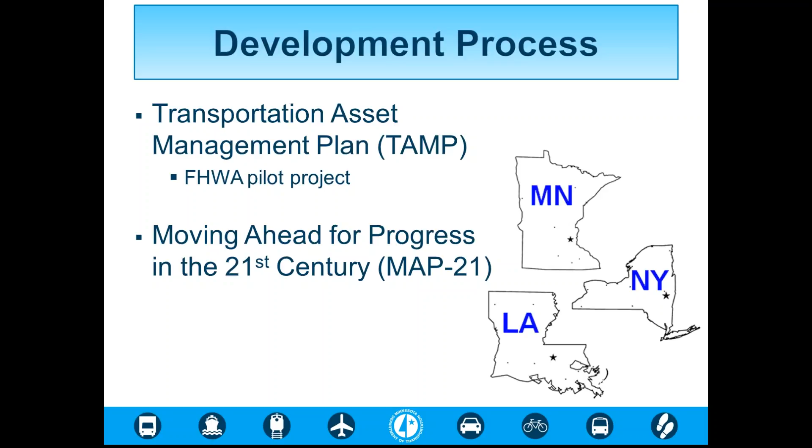Right now, the Transportation Asset Management Plan was finished last summer, and the rules came out. It's in a final draft format, and we're waiting for the rules to be finalized to see if any changes are needed, and then we'll adopt it and make it final after any needed changes, if any.

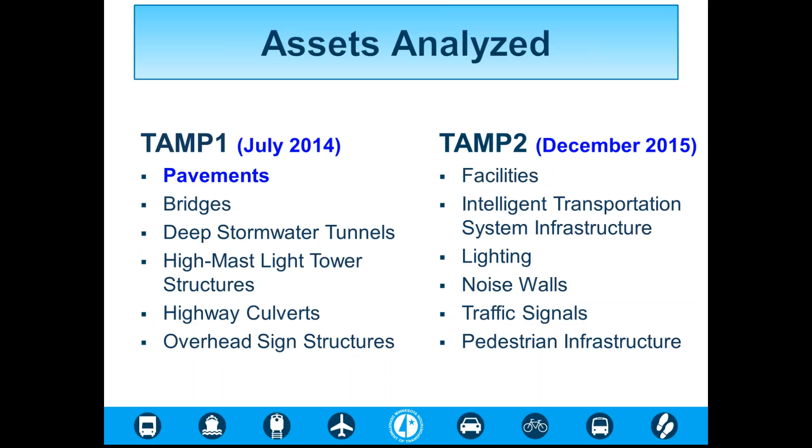Asset management is elevated to the highest level within the agency, and we've received direction from senior leadership to continue with this asset management planning initiative. So we've moved on to completing a TAMP 2 for the assets you see here, with hopes to wrap that up by the end of this year.

Let's get into the second piece of the presentation today, focusing on the TAMP pavement lifecycle costing. The primary purpose is really threefold.

One, to convey strategies for managing an asset effectively using preservation activities. Two, to quantify future maintenance requirements associated with capital improvements and expansion projects. And three, to determine whether replacement decisions are being made in a timely manner and whether an agency is capitalizing on preventative maintenance opportunities.

LCCA, or Life Cycle Cost Analysis, in the TAM should answer the question: which investments made today are most cost-effective in the long term to keep assets at an acceptable level of service? That's really the most important question to answer as you move forward with life cycle costing.

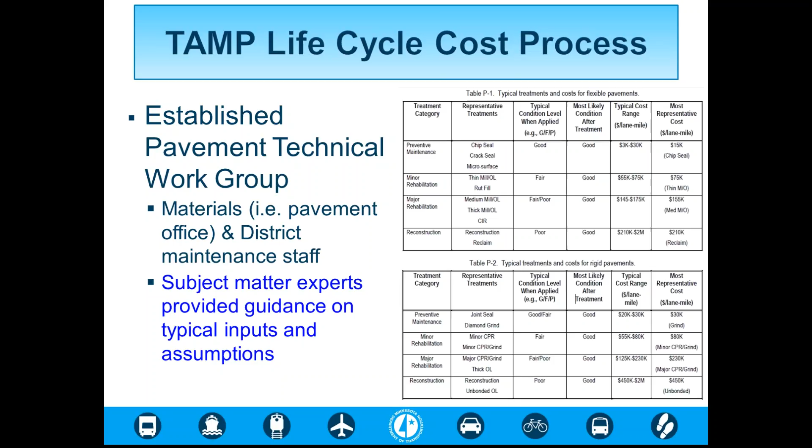There are a couple of tables here taken from pre-assignments we sent to the technical work group for pavements. We asked them to identify the preventative maintenance, minor rehabilitation, major rehab, and reconstruction. You can see the treatments occurring, at what condition level, the most likely condition after treatment, and the costs associated with those treatments.

In terms of the inputs and assumptions, there are roughly a half dozen or so inputs and assumptions for pavements that were collected throughout working with the technical work group. One I'd like to focus on is the 70-year analysis period. That period was selected to capture one major rehab treatment beyond a desired life cycle cost approach, where reconstruction occurs at approximately 50 years.

Second, several treatment cycles and costs were used to compute life cycle costs for flexible and rigid pavements, then combined into one composite value based on weighted averages of the percent of rigid and flexible pavements at the network level. You can see that in bullet 4, specifically the sub-bullet under bullet 4.

Other important things in the discussion of pavements for the LCCA were inspection and operational expenditures. They were investigated but not included in the modeling. Lastly, routine and reactive maintenance costs were included in the LCCA model, and I'll talk about that on the next slide.

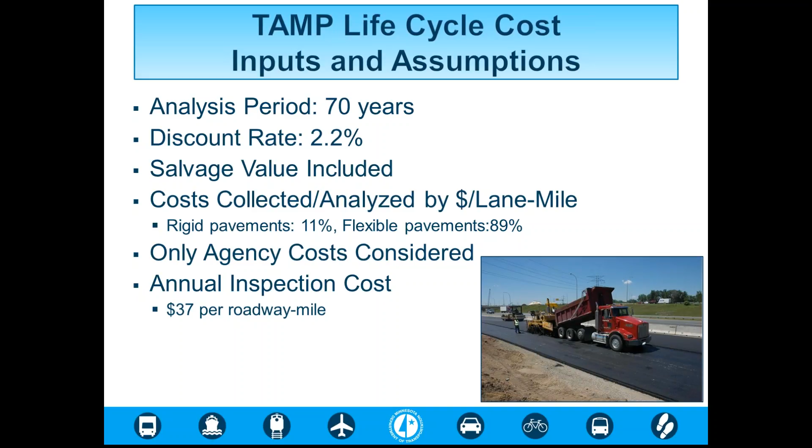As far as routine and reactive maintenance inputs and assumptions, historical expenditures on routine and reactive maintenance were collected and incorporated into the models based on 2012 data collected from MnDOT's Metro District in the Twin Cities metro area. We know that in 2012 we spent $1.4 million on maintenance activities for pavements. That number could not specifically be tied to condition level, good, fair, or poor, but we do know that money was spent on 482 lane miles of pavements, which are broken down by condition in the third bullet on this slide.

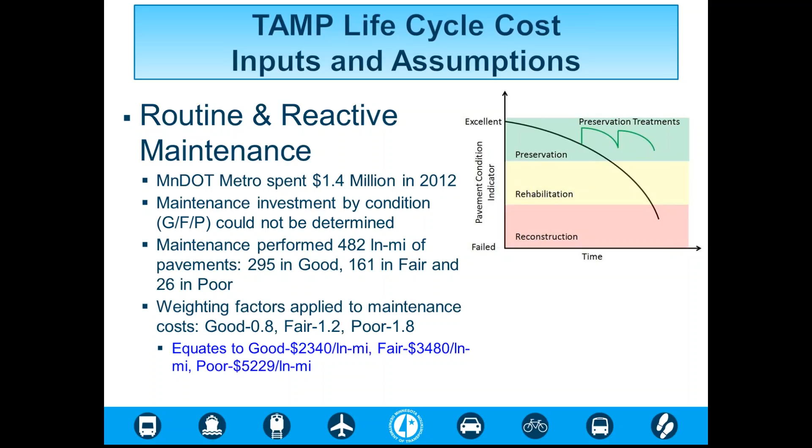So the approach we took was to use a weighting factor and apply it to the maintenance cost: 0.8 for good, 1.2 for fair, 1.8 for poor, which equates to those numbers per lane mile spent of that $1.4 million. Those numbers were incorporated into the pavement model.

MnDOT's TAM life cycle cost analysis compares a worst first, a typical, and a desired approach to pavements. The mill and overlay strategy, which I'll show you on the next couple of slides, represents MnDOT's typical life cycle cost approach, while the full depth reclamation or reconstruction represents MnDOT's desired life cycle approach.

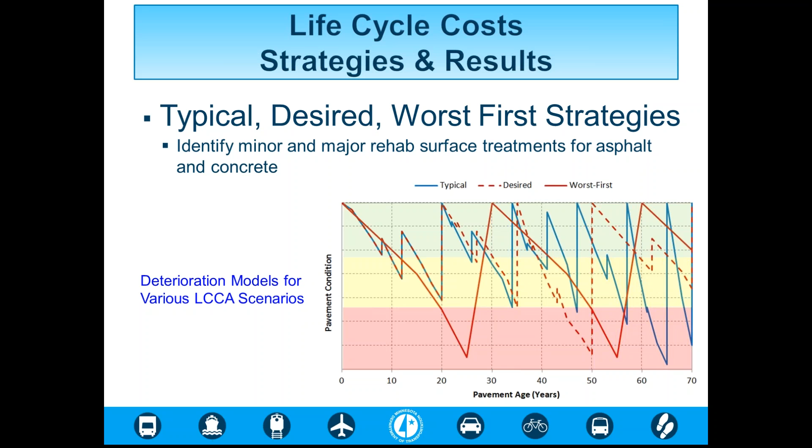The graph on this slide illustrates what happens under each strategy in terms of pavement condition associated with minor and major preservation treatments. The smaller dips indicate minor preservation treatments such as crack and surface treatments, and the medium dips indicate major preservation treatments such as mill and overlays. The large dips, seen between years 20 and 30 for worst first, at year 50, and between 50 and 60 or after for the dashed red and blue lines representing typical and desired, really indicate the reconstruction or full depth reclamation activities occurring with desired and typical strategies.

So we put together and collected the information on the inputs and assumptions and all the data working with the technical work group. We were able to develop these strategies and understand the approach the agency takes. As mentioned on the previous slide, MnDOT is at a network level taking a mill and overlay strategy for flexible pavements system-wide. Of course, this is not occurring on a project-by-project level, but at a system or network level, this is our typical approach.

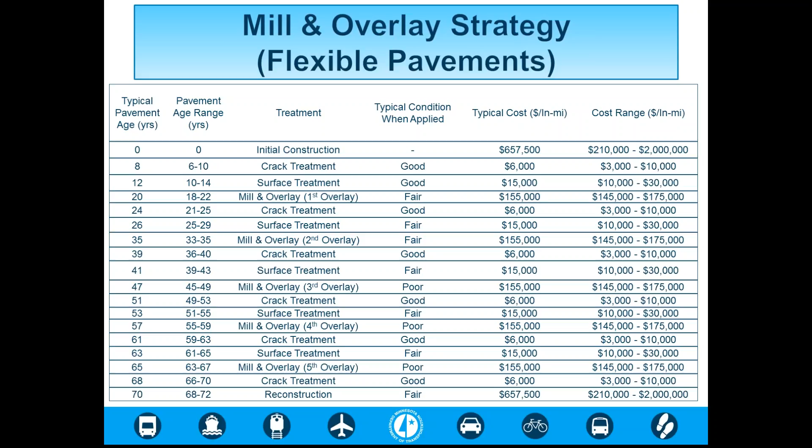Using this information, we were able to put together this strategy, and this table shows that the typical strategy shows reconstruction occurring around 70 years. Now the FDR, or the full depth reclamation and reconstruction strategy, as mentioned earlier, is our desired approach that came out of the modeling.

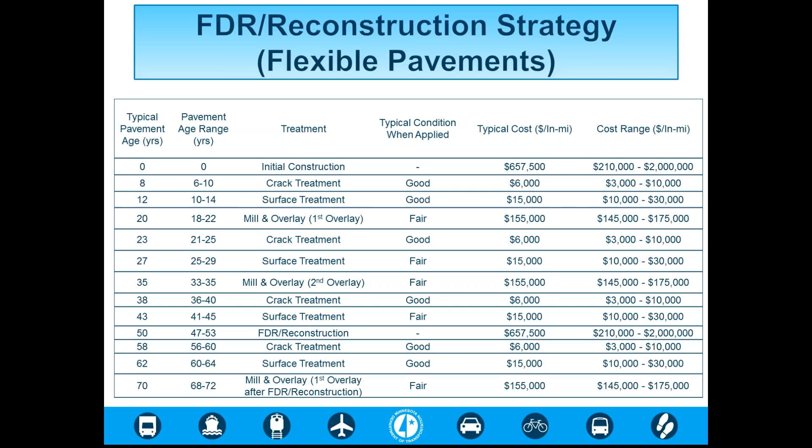In conclusion to this strategy, as a result of the TAM pavement lifecycle cost analysis, we are now identifying more pavement projects that are eligible for upscoping to be reconstructed beyond that 50 years, if you looked at the typical approach, to be more in line with this desired approach that you see in the table on this slide.

That's over the entire inventory over the analysis period. But if we were to take a desired approach or strategy and compare that to what we're typically doing, that would amount to a savings of approximately $600 million over currently what we're doing, again over the entire inventory over the analysis period.

As a result, the TAMP LCCA predictive models that incorporate deterioration and treatment costs and effectiveness allow MnDOT to better and more reliably forecast long-term policy outcomes and program development decisions. It's allowed us to do a better job at managing our pavements.

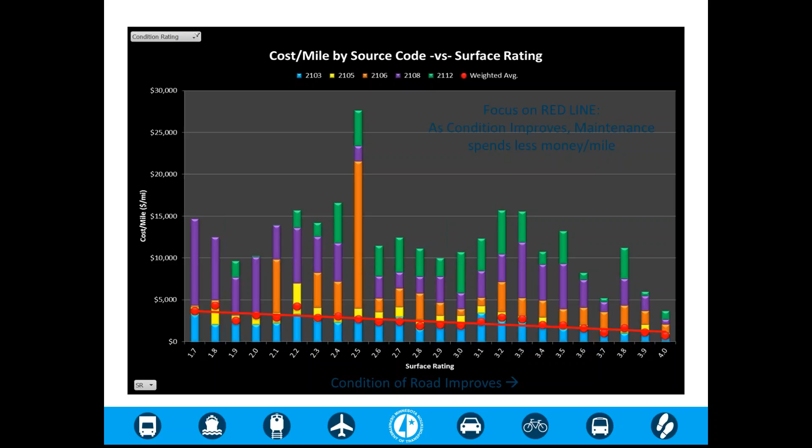So what this means is we're going to take all this information we've collected - and we only have one year of data - and we're going to continue collecting this year after year after year and refine the pavement life cycle analysis from the asset management plan.

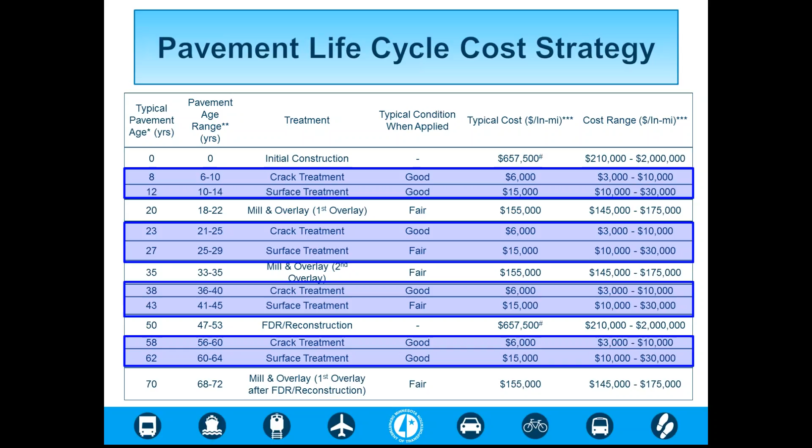That information is going to feed directly into the blue cells you see highlighted here. Having that information will allow us to refine those minor preservation treatments as part of that life cycle cost analysis.

So thank you, I appreciate your time, and hopefully I've given you enough information to help you move forward with life cycle cost analysis for pavements.

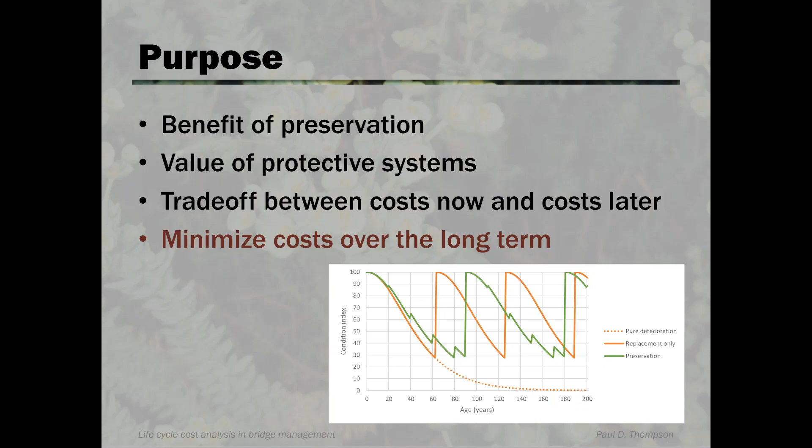So we're trying to keep costs at a minimum over the long term. There are several basic ingredients that go into a life cycle cost analysis: a deterioration model to forecast how quickly different parts of a bridge will deteriorate, cost models to estimate the costs of different kinds of treatments applied to a bridge to either preserve or improve the condition of different elements, and models of effectiveness - what the treatment does to improve condition and how effective it is.

All of those models feed into what's called a life cycle activity profile, which is basically a type of plan for the whole future of a bridge, planning out over time just what kinds of work might be done at different places in a bridge's life cycle. The part you care most about involves spending money now or in the near future, but those decisions also depend on how long you can postpone future costs. So we're trying to analyze what that long-term effect could be.

This will give you some idea of the trade-off between the scope of work you might undertake now and the timing. If you do certain work now, perhaps you can postpone future work till much later. There are also performance trade-offs related to the amount of money you put in now versus the condition of bridges in the near future and the far future. So we would like to use the analysis to shed light on how money going into the system results in good condition coming out of the system.

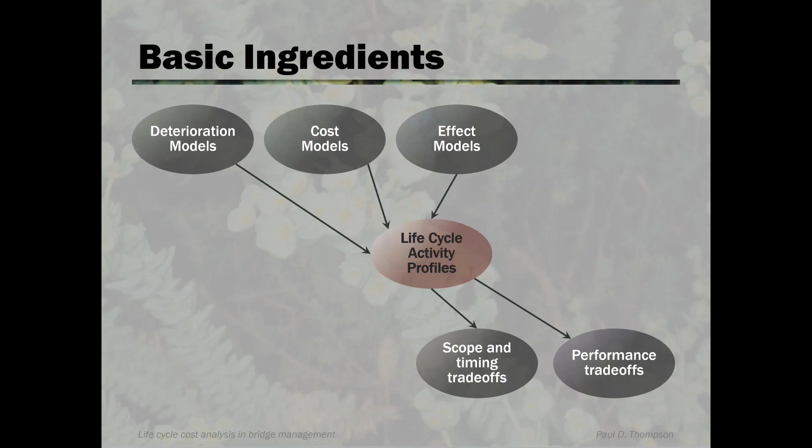Just to give a quick, simplified quantitative example of a life cycle activity profile, here we may be looking at two alternative futures for a bridge over a 50-year period. Alternative number one involves doing preventive maintenance, and alternative number two involves not doing anything right now, but then replacing a bridge relatively soon in 12 years. Under the preventive maintenance strategy, perhaps we can get at least 20 additional years out of the bridge and postpone that replacement out to the 35th year.

One of the key inputs into a life cycle cost analysis is a discount rate. So here I'm comparing a discount rate of 95% versus a rate of 90%, just to see what difference it makes in the analysis. And you can see it does make a difference as far as which of the alternatives is going to be the least expensive over the long term.

At a 95% discount rate, alternative number one turns out to be $799,000 over the long term versus only $464,000 at a 90% discount rate. And that's because you're giving less weight to that future replacement cost.

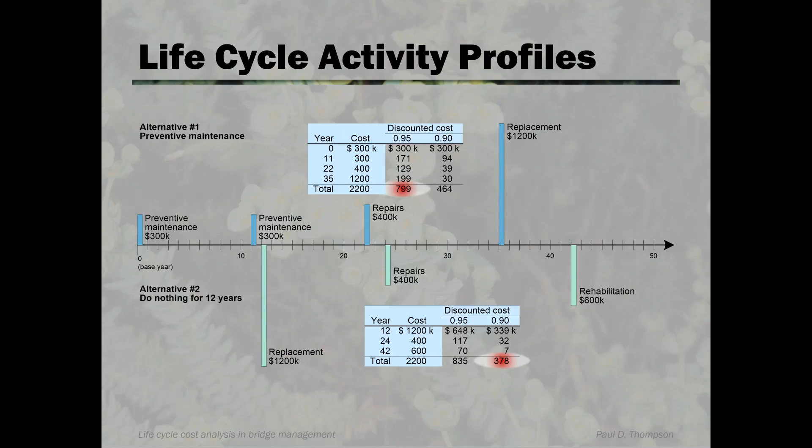Now, one of the first ingredients to do a life cycle cost analysis is a deterioration model. Most of the states have a bridge management system called Pontis, which is used for doing life cycle cost analysis. You can see an example here of just the kind of language used in describing bridge conditions, in this case for painted steel girders.

The states are currently in the process of making a transition to a new version of the condition state language, and AASHTO is in the process of developing a new version of its bridge management software to reflect that new condition state language. So you're looking here at the old version, which is what most of the states are still using today, but soon that transition will move over to a new set of definitions. The concepts I'm illustrating here are the same either way.

So if you're looking at a set of data in your Pontis database, say your past inspections, the only thing you see in your inventory is an inspection in 2005 and another inspection two years later in 2007. Your bridge database doesn't tell you what happened in between those two sets of data. So when you're trying to estimate a deterioration model, you're trying to figure out quantitatively what might have happened between those two data points. The blue lines illustrate deterioration paths, different ways condition may have deteriorated between 2005 and 2007 if nothing was done to preserve the bridge.

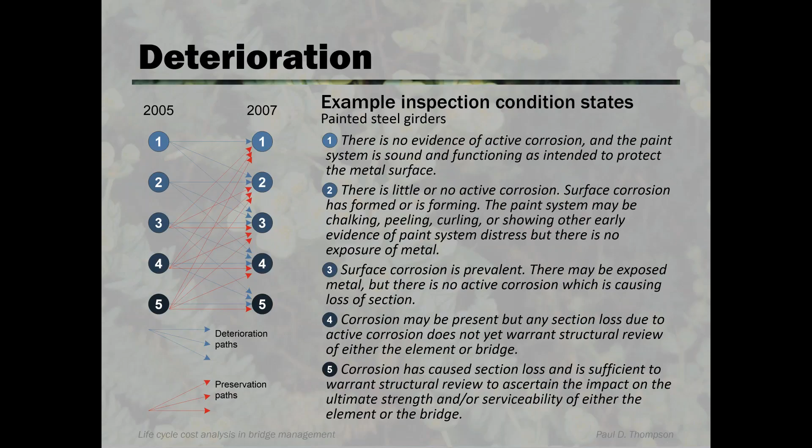The way we quantify that deterioration rate is something called a Markov model, or Markovian model. If you look at bridge management systems around the world, this is pretty much the only way anyone is doing it at the network level. And the reason for that is it's pretty much the simplest possible deterioration model you can have with the types of inspection data that agencies are using.

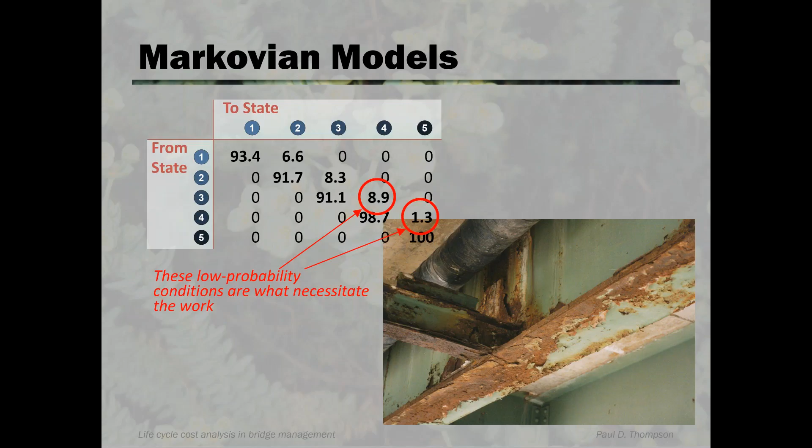So we'd like to be able to develop models like that, and there are some pretty good methods to do that. The first one, and this is what most of the states have been using with their Pontis system, is expert judgment. The great thing about expert judgment is it's easy and cheap. The bad thing is, what we found from our research, is it doesn't agree with real inspection results as well as we would like. It's better than nothing, but you would like to be able to improve on it, and I'll describe what the differences are in a moment.

Statistical modeling is the other approach, and that is definitely the recommended approach. A number of states have started to do this because most of the states doing element inspection have been doing it for quite a few years now and have pretty large data sets. I did an analysis a couple of years ago in Florida where they had more than 1 million records of element inspection data that we could use for deterioration models.

That's a lot of data. You can produce really good models if you have 1 million data points in your database. And that's not uncommon at all—Florida's inventory is just an average size inventory for bridge deterioration modeling.

We found with statistical modeling, you need about 500 inspection pairs. An inspection pair is just an inspection at one point in time and then another inspection 2 years later. So that's a pair of inspections, and you need 500 of them. If you've been doing bridge inspections for say 5 cycles, then you need 100 bridges containing a particular element in order to have enough to do a deterioration model. So it doesn't really take that much when you're looking at a statewide inventory of bridges.

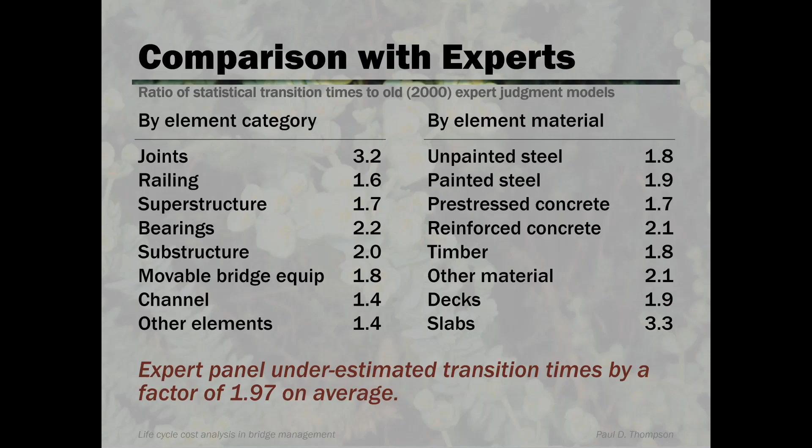The reason is when you get a panel of experienced experts sitting around a table thinking about bridges in the past and how quickly they deteriorated, they tend to remember things that change more easily than things that stay the same. So they tend to remember deteriorating bridges more readily, and that causes them to underestimate transition times. So that's something to be aware of, that your transition times may be underestimated if you're using expert judgment-based models. That's one good reason to do a statistical analysis instead.

Now, in bridge management systems, you also need cost models to do a life cycle cost analysis. There are direct costs of labor, materials, and equipment, and also contract pay items if you're doing contract work. And there also are indirect costs, which are also important. In some types of projects, especially preservation projects, the maintenance of traffic and mobilization could be as much as half the project or even more. So you need to include that because those are all costs that also are affected by a decision to do preservation or not do preservation. It's important to include all of those things, and as Kirby described for you, it takes some effort to get your system set up so you're really capturing good data, but it's a garbage in, garbage out process, so you need to have good data going in order to feel confident with the conclusions that come out.

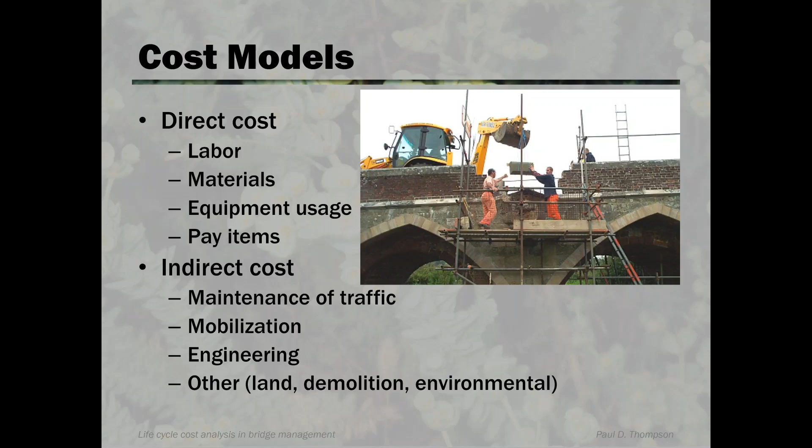In order to develop cost models, one of the things that we've done in a few states is to actually take different elements and group them together into categories that we can more easily map onto maintenance management system activity codes. This worked pretty well. This example is from Florida. We were able to group elements in this way and get a reasonably good match for more than half the elements between the maintenance activity codes and the Pontis action codes. From that information, we were able to develop estimates of unit costs and also effectiveness of different kinds of actions, so that we had some good quantitative information to use in the analysis. Incidentally, we found that if you sit a group of experts around a table to estimate unit costs, the experts tend to underestimate the unit costs, that things actually cost more than what they are estimating.

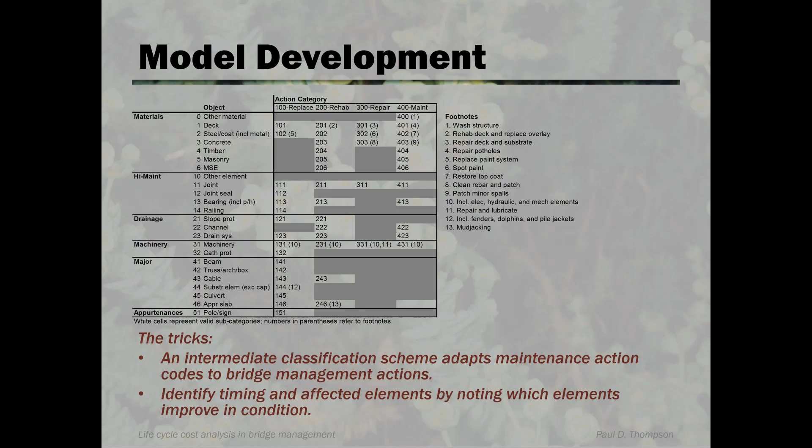Action effectiveness can be done using a similar process of statistical analysis using maintenance activity, by grouping elements into categories, so you can match the bridge management system actions to your maintenance activity codes. This is an example again from Florida. We did a statistical analysis of condition before and after different actions that had been taken during the period when we had element level data, and we found that actually the expert panel had underestimated the effectiveness of actions. Conditions actually improved more than what the panel had estimated between the before and after inspections when an action was taken. So that was a good thing.

We found that the deterioration models tended to overestimate needs because they overestimated how quickly things deteriorate, but the costs and effectiveness worked the other way around. In the end, we ended up with needs estimates that were reasonably good, although the data going in were not so good. But this is something that in the future now, since we have statistically based models, we're able to improve on this and have more accurate needs estimates.

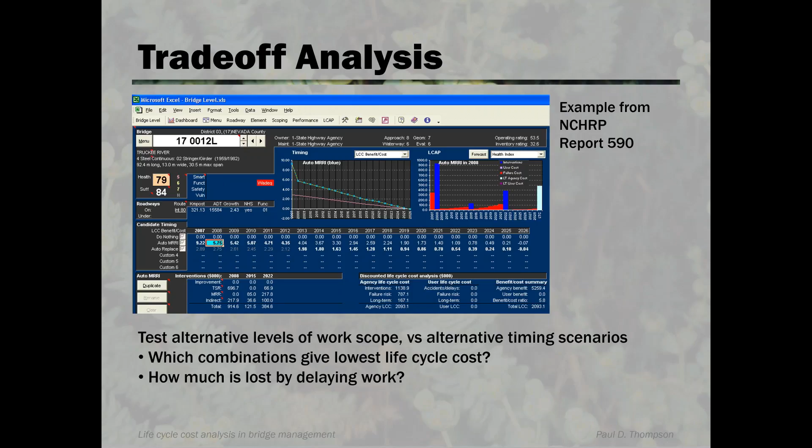But the life cycle cost analysis and the investment analysis will help you figure out quantitatively what that condition is likely to be at some time in the future. So this is a really useful analysis for setting targets.

For your TAM plan, you need to set a 10-year target, and you can use this kind of analysis to figure out just what kind of condition is achievable after 10 years under a given fiscal scenario. Shobna will describe in the next presentation just how to get at these fiscal scenarios, to figure out what is reasonable to decide how much money will go into this analysis.

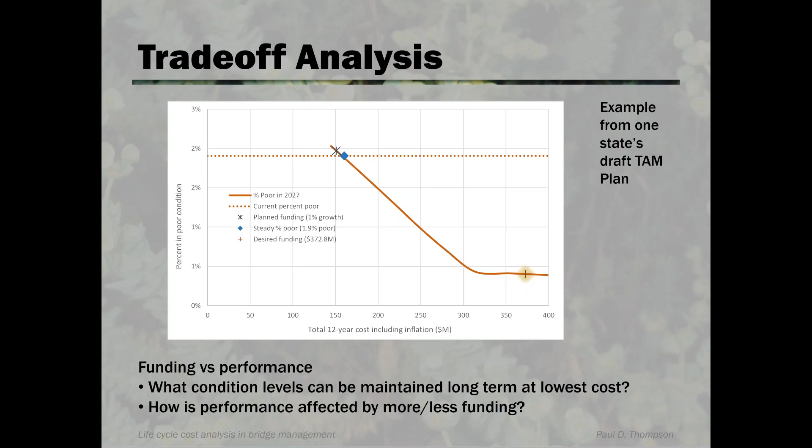And the fundamental life cycle cost trade-off we're trying to get at is to find the happy medium. You're not doing too much maintenance, not doing too little maintenance. There is a point where you're optimizing your expenditure, keeping the long-term cost at a minimum over the long term.

Typically, that keeps bridge elements in pretty good condition. But rather than just saying pretty good condition, this is an analysis that will help you say quantitatively what you mean by pretty good condition, as in 2% poor, or some quantitative measure like that, which is what you need for your transportation asset management plan.

So the conclusions for the bridge life cycle cost analysis: the methods are pretty mature. At the project level, they've been in use for a very long time, and even at the network level, they've been in use for a great many years.

They are sensitive to the quality of data, and so with element level inspection, the states, for the most part, have had really good condition data. They have not so far had very good cost data, but that is something that is changing in a lot of states because of efforts like what Kirby described.

Many agencies do have suitable data already and have been able to do some good modeling, particularly of deterioration. Bridge management systems put the work to use in order to take this information and guide day-to-day decision-making about preservation investments and resource allocations that might be made.

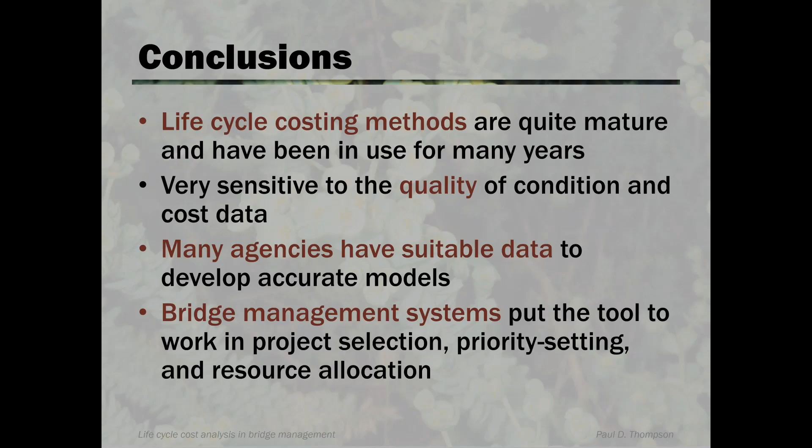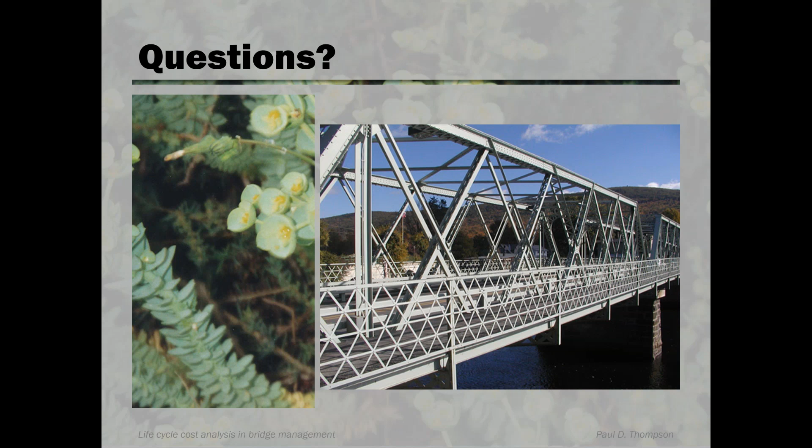Fantastic, thanks Paul. I wondered if you could clarify one thing for me. When you were talking about statistical modeling under the model development, you talked about the fact that you need 500 inspection pairs per element or group. I wondered whether that number varies based on the size of the population, or if there's some method you use to calculate that.

Right, it actually doesn't vary based on the size of the population. It's actually more a description of how big the population needs to be for the modeling to work. You'll get better statistical performance with a bigger population, of course.

You would like to be able to do validation of your models, so you'd like to hold aside an additional 500 inspection pairs in order to check the validity of the statistical model that you develop. But you can get a good model with 500 inspection pairs.

What we have to do a lot of times for uncommon elements, for example, there's an element for steel bridge cables, it's hard to pull together 500 inspection pairs because most states just don't have very many cable-supported bridges in their inventory. So you may have to group those elements with other steel elements in order to get a big enough sample size to do an analysis.

And that was what we did in the Florida work I described. Actually, we've done that in every state that I've done this kind of work. We look at the populations, and if we can't get 500 inspection pairs, then we'll group some elements together so we do have 500 inspection pairs.

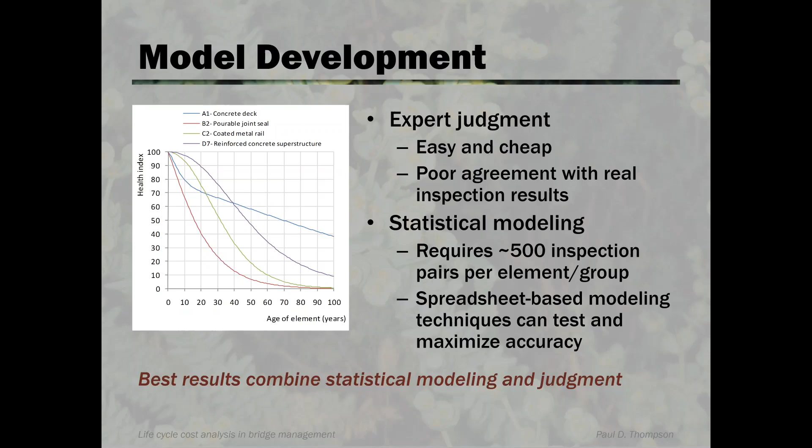That's a great question, and I don't think anybody has a good network level approach to that, but this is often done at the project level, where you might use your traffic forecasting models to try to forecast congestion, and then you might use a user cost model to estimate value of time wasted by commuters in congested roadways, basically looking at the delay caused by lack of roadway capacity.

So that kind of analysis has been done for a long time at the project level. But bridge management systems right now don't have a good way to do this at the network level, and so it's a problem. It's probably one of the next great topics for research as agencies get comfortable with AASHTO's new system, as far as future enhancements that could be made to that system.